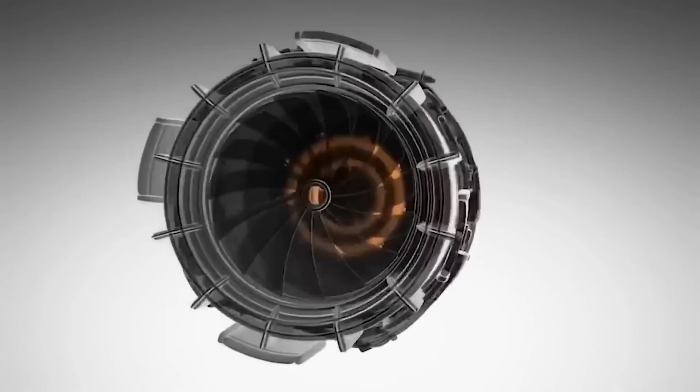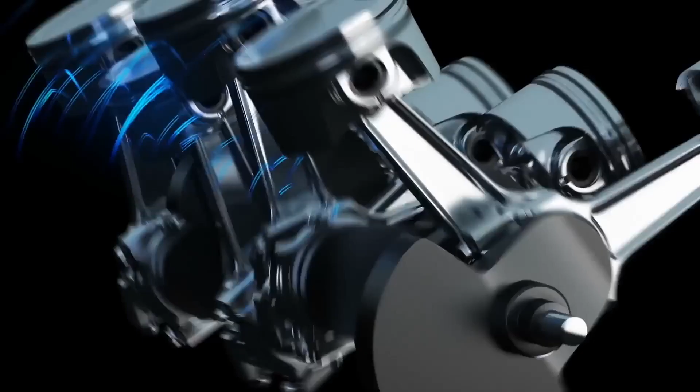In a groundbreaking announcement that could redefine the future of transportation and energy, Elon Musk has unveiled a revolutionary new water engine. This astonishing innovation promises to change everything we know about how engines work, potentially setting the stage for an era of unprecedented environmental sustainability.

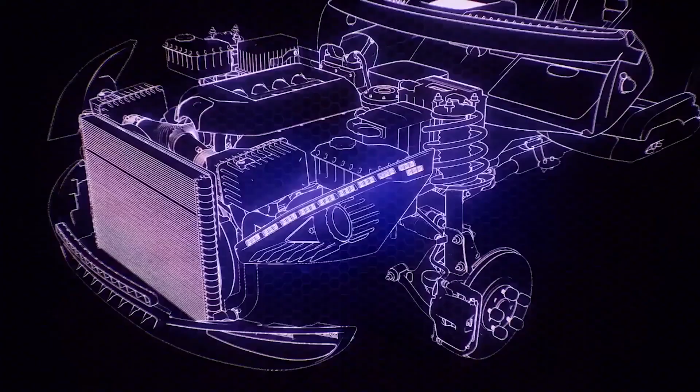But what makes this water engine so different? And how could it potentially alter the landscape of global technology and ecology? Let's uncover the mechanics behind Musk's latest venture and explore its far-reaching implications.

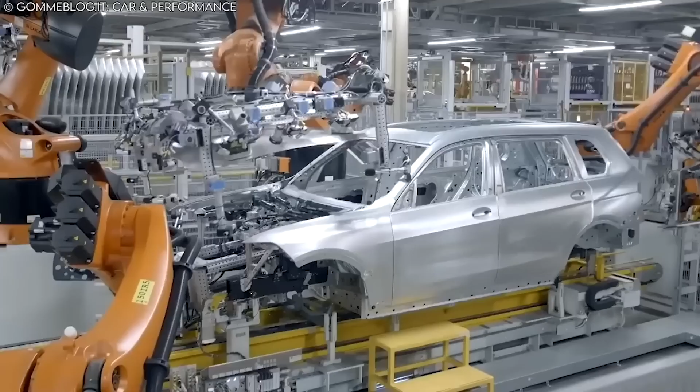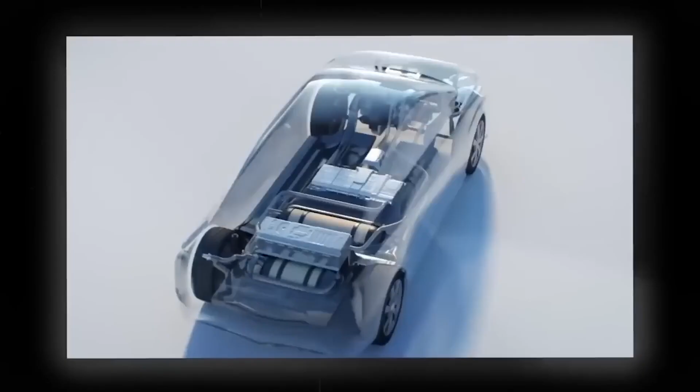Elon Musk surprised his X, formerly known as Twitter, followers by revealing a significant change in Tesla's direction. After years of skepticism, Musk announced that in 2024, Tesla will make a switch from batteries to hydrogen power. This unexpected shift was further emphasized as he disclosed that the first vehicle utilizing this new fuel source will be

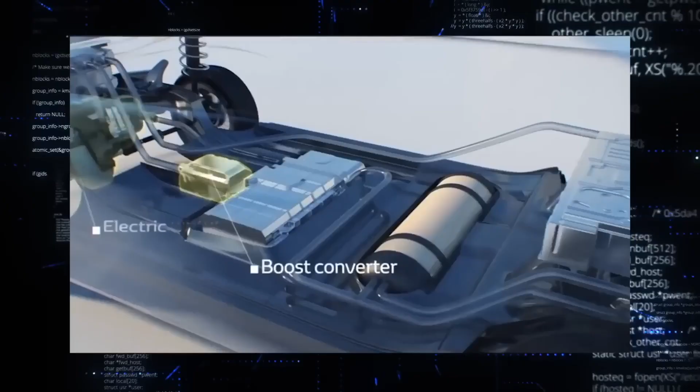named the Model H. Musk had once referred to hydrogen fuel cells as fool cells and expressed his belief that the technology was mind-bogglingly stupid. This complete reversal is now credited to challenges encountered in the mass production of the 4680 battery, prompting the company to reconsider its approach and opt for hydrogen power as an alternative solution.

Tesla, the global leader in electric vehicles since its establishment in 2003, has been spearheaded by Elon Musk. Committed to enhancing the average living standards through cutting-edge technology while prioritizing environmental sustainability, Musk has steered Tesla to the forefront of the renewable energy and transportation revolution.

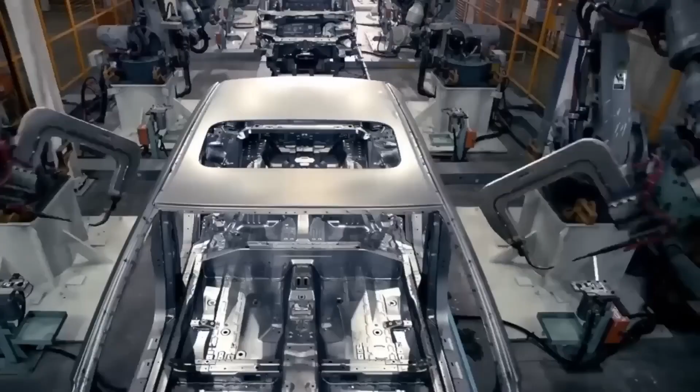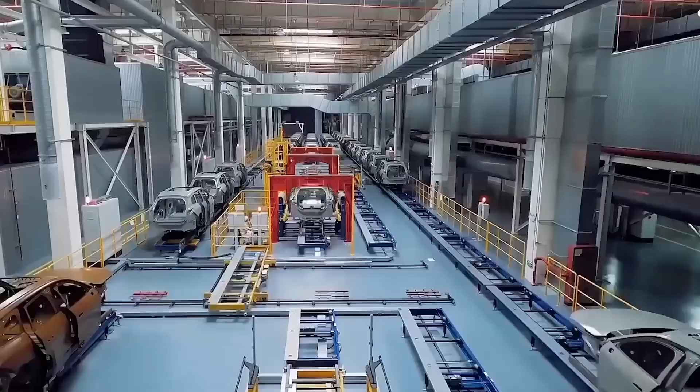Investing in various eco-friendly projects and utilizing his platforms to advocate for change, Musk aims to change the way people think about energy, fuel, and climate change. As the world increasingly accepts and advocates for cleaner energy solutions to combat climate change, electric vehicles, with Tesla leading the charge, are gaining popularity.

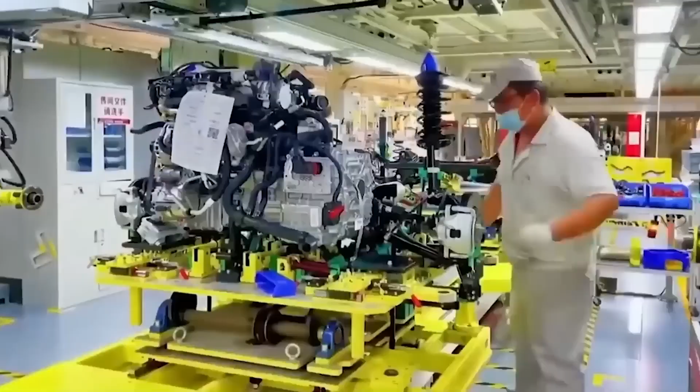Tesla has recently gone public with their plan to introduce a new energy source: hydrogen fuel cells. This development prompts the question: what are hydrogen fuel cells, and how will they transform your driving experience? Vehicles, notorious for contributing significantly to climate change through fuel combustion, have seen a transformative alternative in electric cars. Tesla, Musk's multi-billion-dollar automotive giant, produces 500,000 electric vehicles annually, contributing substantially to the growing societal acceptance of electric cars.

Electric cars, like those produced by Tesla, primarily rely on batteries for power. These batteries, similar to those in laptops but larger, store electricity obtained from the grid or charging stations. However, issues such as long charging times, range anxiety, and high costs have deterred consumers. In response, hydrogen fuel cells have emerged as a promising alternative, eliminating many of these drawbacks.

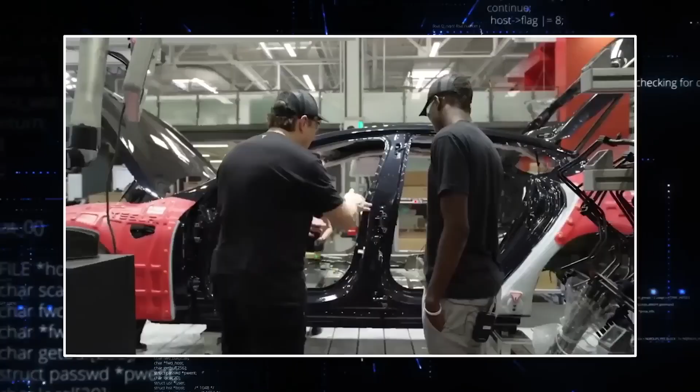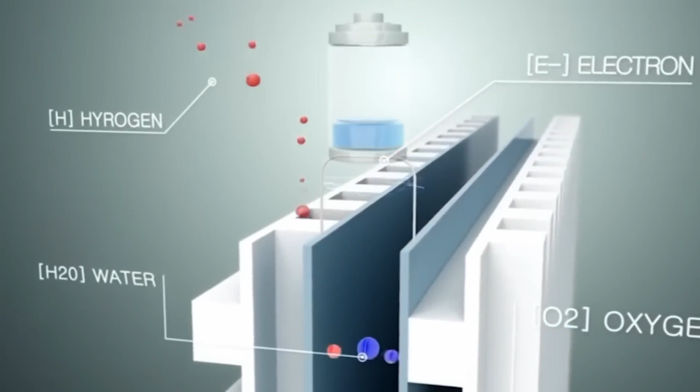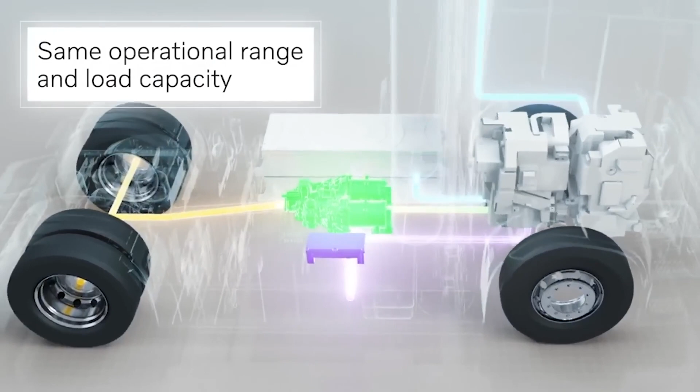Contrary to Musk's earlier skepticism about hydrogen technology, fuel cells have gained interest in the automotive industry. But what exactly is a hydrogen fuel cell, and how does it function? Positioned strategically among a vehicle's components, the fuel cell collaborates with a battery, electric engine, and hydrogen tank to generate energy. Multiple fuel cells work simultaneously through a process called reverse electrolysis, where hydrogen reacts with oxygen to produce electrical

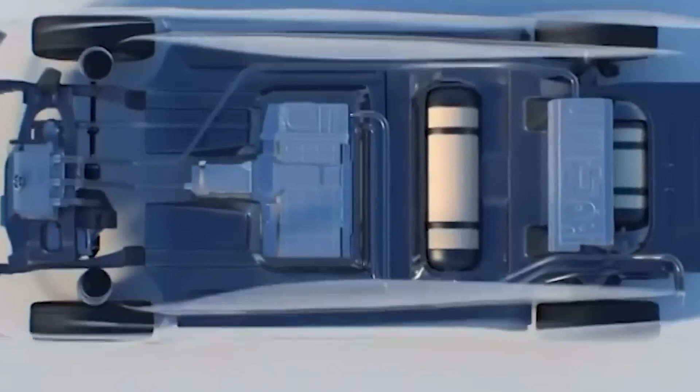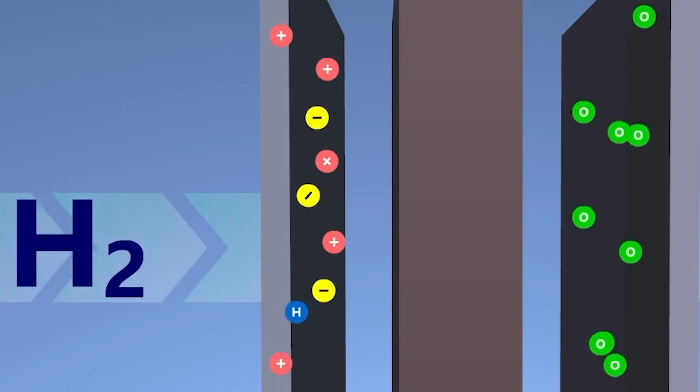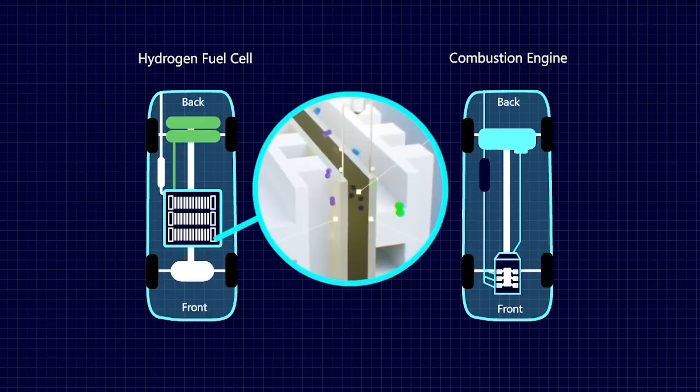energy. Unlike traditional electric vehicle batteries, fuel cell batteries are smaller as they are constantly charged by the fuel cell. This process ensures a continuous and sufficient supply of electricity. The byproduct of the fuel cell is water vapor, emitted harmlessly into the air. The quality of hydrogen used influences whether the byproducts contribute to climate change. Renewable energy sources produce hydrogen with a neutral carbon footprint. Despite public perceptions, scientists believe that hydrogen fuel cell technology holds promise and will catch up in the coming years.

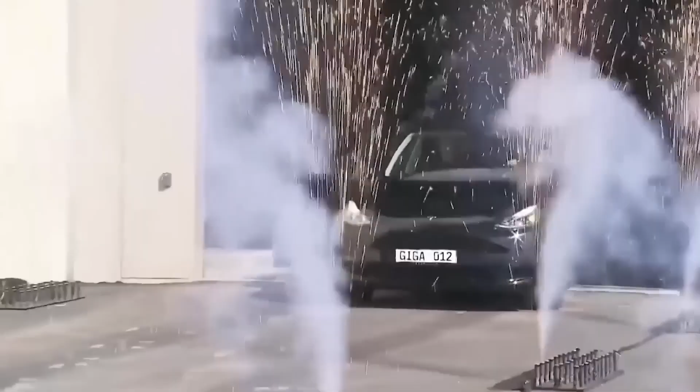Apart from the environmental benefits, fuel cell electric vehicles offer distinct advantages in the driving experience. One noticeable difference is the silence of electric vehicles. Without the mechanical sounds associated with traditional cars, electric vehicles provide a remarkably quiet ride. Hydrogen fuel cars, taking this a step further, stand out even among their electric counterparts due to their swift refueling time. Charging time is a significant factor between battery electric and hydrogen fuel cell cars.

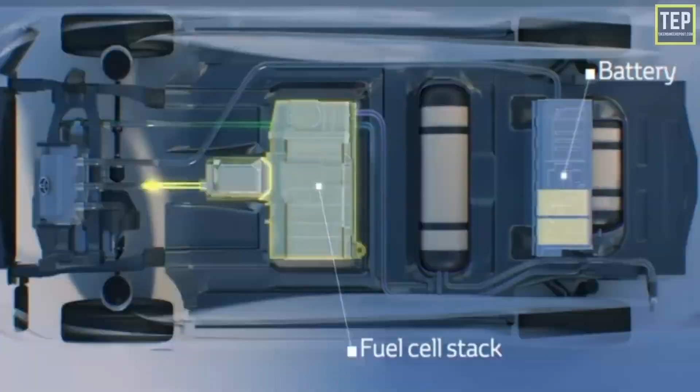While battery electric cars may take several hours to charge fully, hydrogen fuel cars are ready to go in no time, provided the hydrogen tanks are filled. This, coupled with the energy output of a hydrogen tank, gives fuel cell cars a more extensive range than their electric counterparts. From 2024 onward, the first vehicle to feature this innovation will be the Model H, boasting technology and a remarkable 0 to 60 miles per hour acceleration in just 1.2 seconds, with a range of 450 kilometers.

While hydrogen fuel cars are currently more expensive due to their rarity and the limited availability of hydrogen stations, industry experts predict a change in the next decade. With the urgency to address climate change, more automobile companies are embracing cleaner technologies.

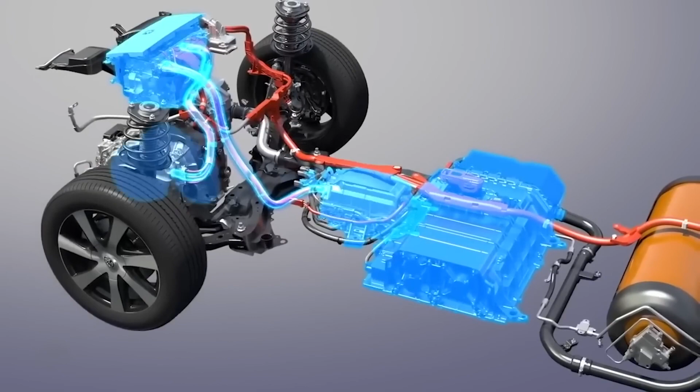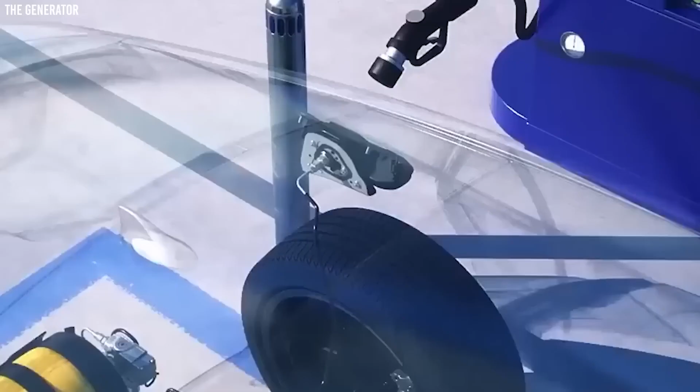Model 2 and Model 0 are slated for release in 2025 and 2027, respectively, and are expected to be supercars. As Tesla pioneers this shift toward hydrogen fuel cells, the automotive landscape is ready for a significant transformation.

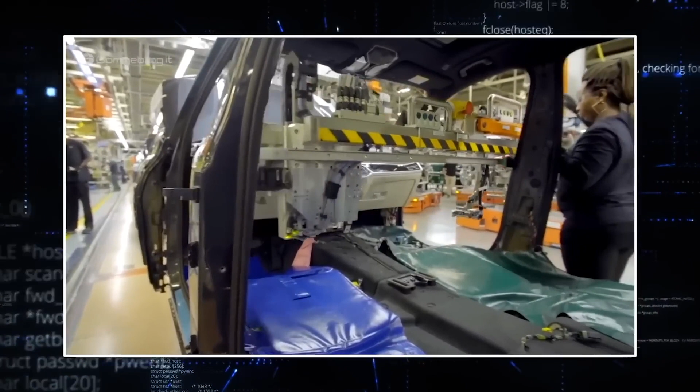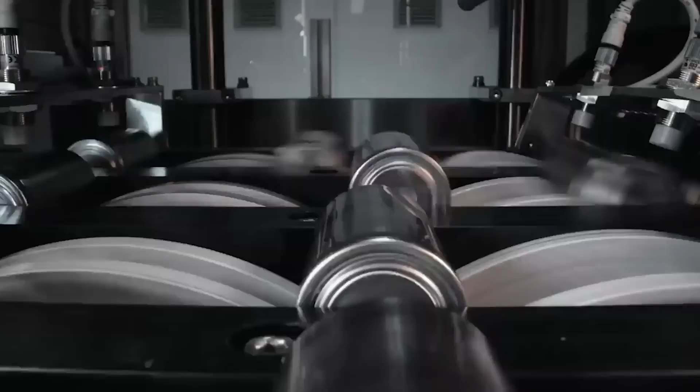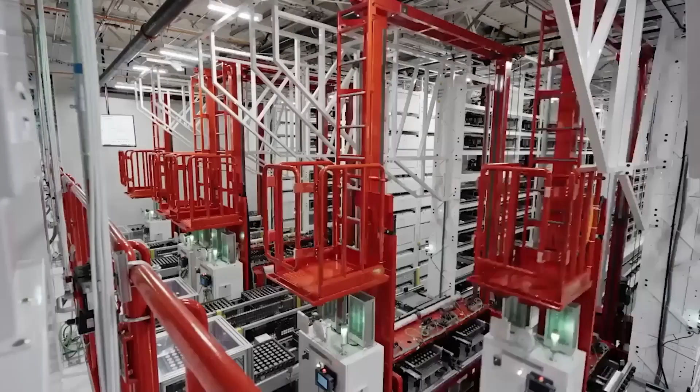Elon Musk is no stranger to controversy, and one of his lasting points of contention lies in his strong views on hydrogen as a fuel source for vehicles. However, as with many debates, not everyone is in harmony with Musk's perspective. In the changing landscape of electric vehicles, EVs, there exists a difference of opinions on the potential of hydrogen fuel cells versus traditional batteries. Musk's stance on hydrogen is robust and dates back several years.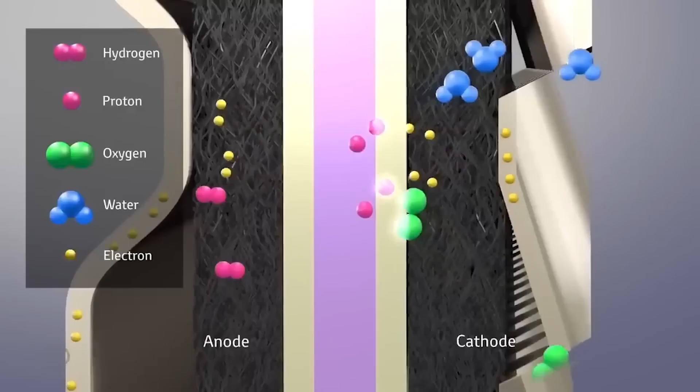During a discussion at the Automotive News World Congress, he honestly labeled hydrogen fuel cells as extremely silly. Musk highlighted the inherent challenges of producing, storing, and utilizing hydrogen in automobiles, emphasizing the technological superiority of existing battery technologies. Even with Musk's rigid position, the automotive arena is not a single company.

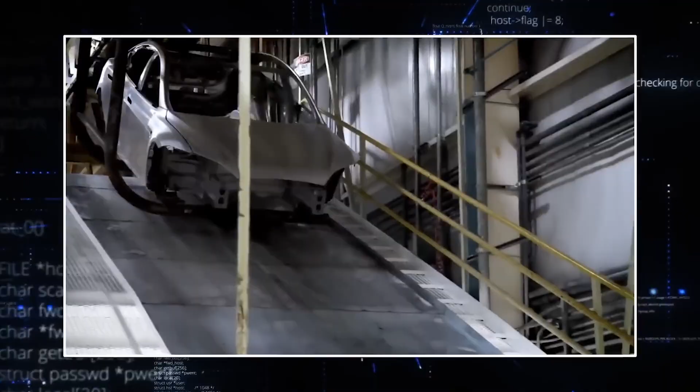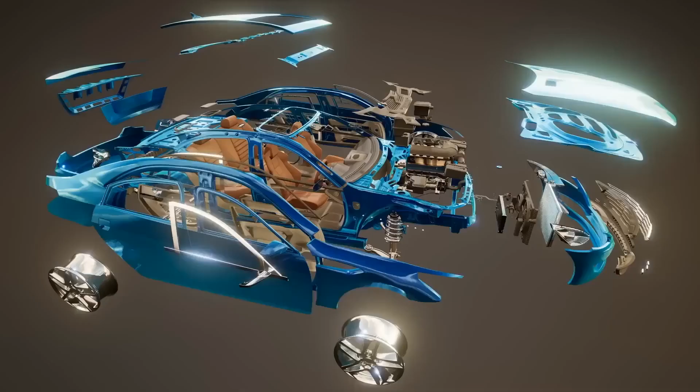Major players in the industry, including Toyota and Hyundai, have invested substantially in the development and production of hydrogen fuel cell vehicles. This commitment extends beyond industry giants, with smaller manufacturers like Riversimple actively engaged in creating hydrogen-powered cars. The contrast in opinions is not limited to the manufacturing side of the industry.

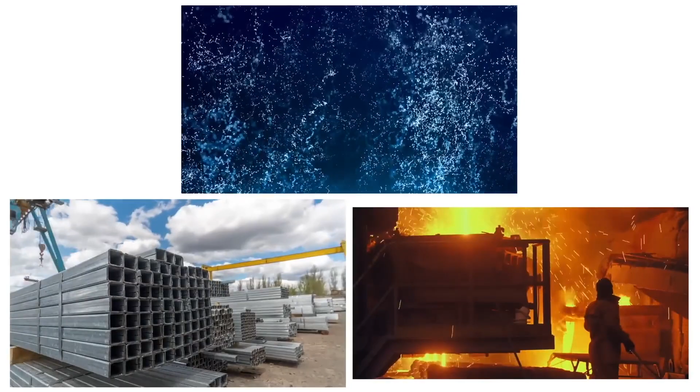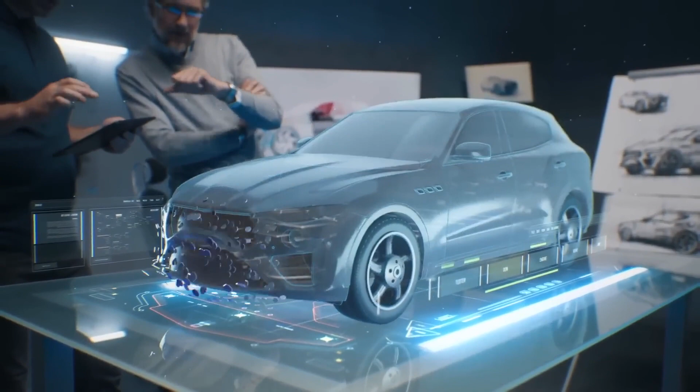Other prominent figures, such as Herbert Diess, the CEO of Volkswagen Group, have voiced similar concerns about the viability of hydrogen in the automotive sector. Diess states that green hydrogen produced using renewable energy sources is better suited for heavy industries like steel and chemicals, and should not find application in automobiles due to being expensive, inefficient, slow, and logistically challenging.

Musk's beliefs on hydrogen, expressed on various occasions, include a series of tweets in mid-2020 where he declared, "Fuel cells = fool cells," and insistently stated that hydrogen fuel cells make no sense. Despite these unequivocal statements, Musk has not publicly indicated any shift in his views on hydrogen when contacted via Tesla by CNBC.

The technological foundations of Musk's skepticism toward hydrogen lie in the fundamental differences between traditional battery electric vehicles and those powered by hydrogen fuel cells. According to the U.S. Environmental Protection Agency, EPA, hydrogen fuel cell vehicles, also known as fuel cell electric vehicles, FCEVs, share similarities with electric vehicles in that they use an electric motor instead of an internal combustion engine to propel the vehicle. However, the key distinction lies in how these vehicles generate electricity.

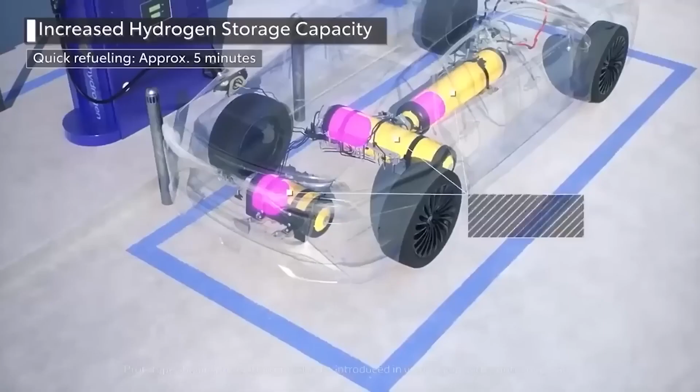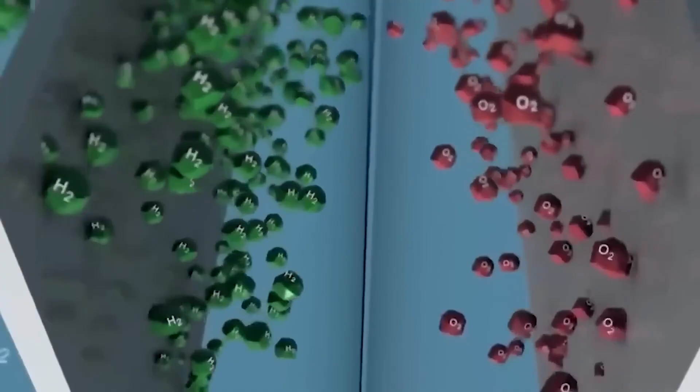In the industry of electric vehicles, batteries necessitate charging through external power sources. Contrastingly, fuel cell vehicles use hydrogen gas to generate electricity on board. This process involves the mixing of hydrogen gas from a tank with oxygen, resulting in the production of electricity. The diversity of opinions within the automotive sector is symbolic of the broader debate surrounding the future of transportation and the role of hydrogen in it.

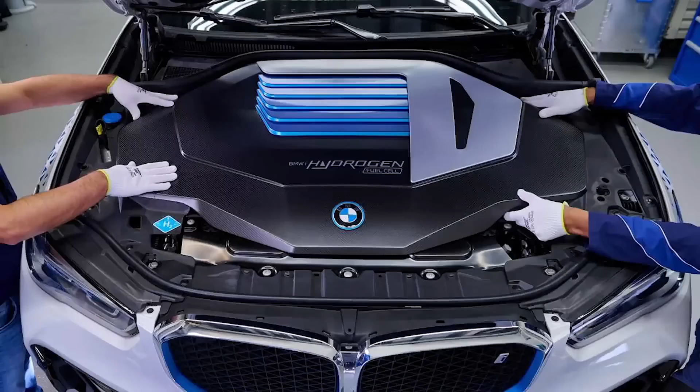In June, the BMW Group announced the initiation of tests for vehicles featuring a hydrogen fuel cell drivetrain, emphasizing its potential to complement internal combustion engines, plug-in hybrid systems, and battery electric vehicles. Despite the growing interest in hydrogen, especially within the context of fuel cell electric vehicles, it's essential to recognize that these technologies are not yet dominant in the market.

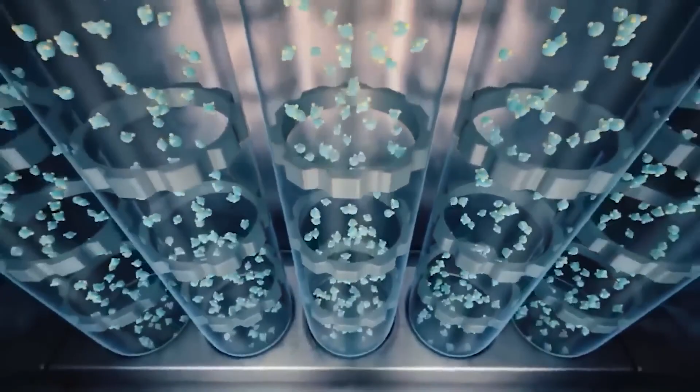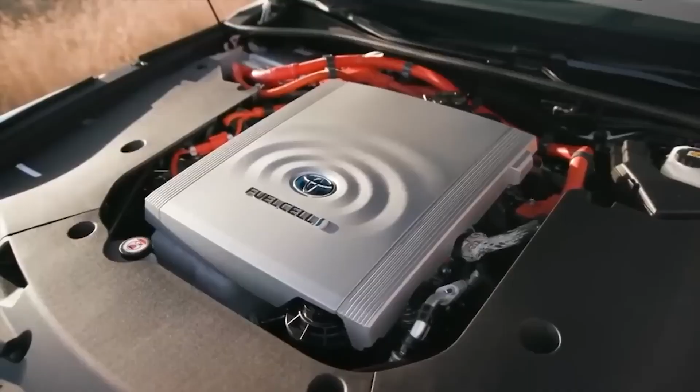Companies like Riversimple, though actively working on hydrogen-powered cars, offer them on a subscription basis, indicating that such vehicles do not currently constitute a substantial portion of overall car sales. Toyota, a large supporter of hydrogen technology, imagines its applications extending beyond automobiles to diverse settings, including heating, lighting, haulage, mass transit, and heavy industry.

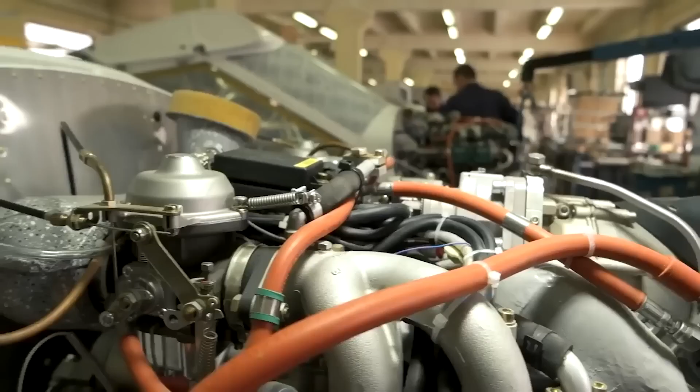The Fuel Cell and Hydrogen Energy Association voiced this idea, emphasizing the zero-emission benefits, long-range capabilities, quick refueling, and scalability of fuel cell electric vehicles and hydrogen energy. In the pursuit of low and zero-emission transportation, the conversation extends beyond passenger vehicles. Larger forms of transport, such as trucks, buses, trains, and planes, are increasingly considered within the purview of hydrogen fuel cells.

Daimler Truck's CEO, Martin Daum, advocates for a balanced approach, acknowledging the suitability of different technologies for distinct scenarios. While battery electric vehicles excel in city deliveries with lower energy requirements, long-distance transportation scenarios might benefit from the practicality of hydrogen fuel cells. The versatility of hydrogen fuel cells finds expression in various sectors beyond automobiles.

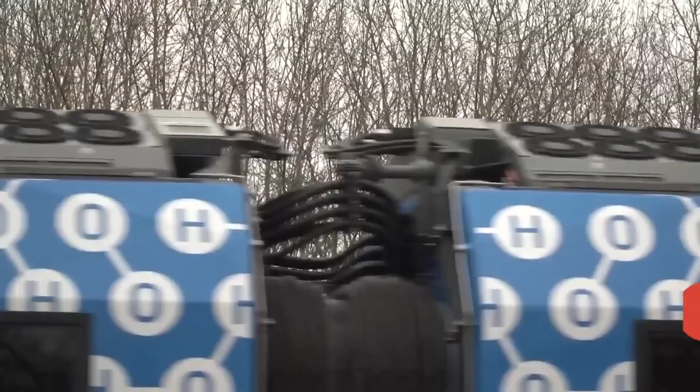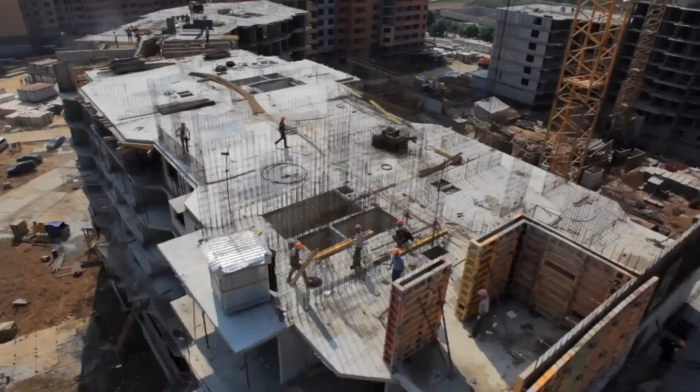European transport giant Alstom has developed the Coradia iLint, advertised as the world's first passenger train powered by a hydrogen fuel cell. In aviation, plans to operate commercial hydrogen electric flights have been announced, with aspirations to take to the skies in 2024. The construction industry, represented by major players like JCB, has not been left behind, with the development of a 20-ton excavator powered by a hydrogen fuel cell. While excitement surrounds the potential applications of hydrogen fuel cell technology, the path to mass adoption faces some big challenges.

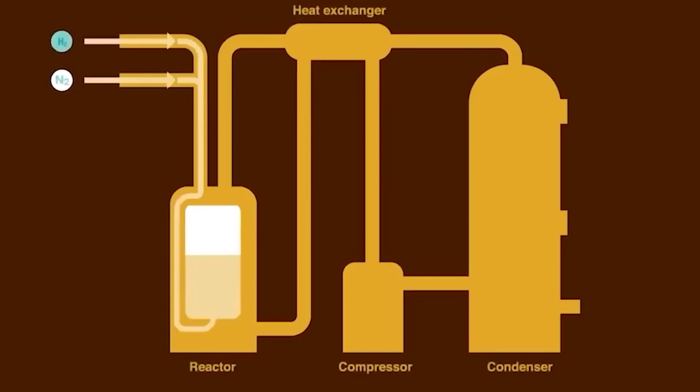Honda's decision to stop production of its Clarity plug-in hybrid and fuel cell models earlier this year demonstrates the hurdles related to durability, reliability, and vehicle cost. The US government has highlighted infrastructure limitations as a significant obstruction, quoting concerns about the current inability of the infrastructure to support the widespread adoption of fuel cell vehicles.

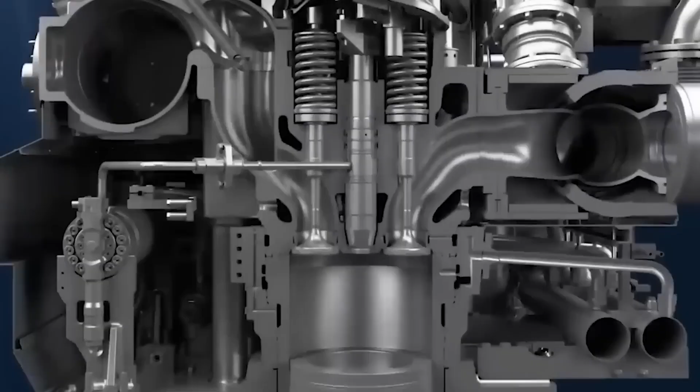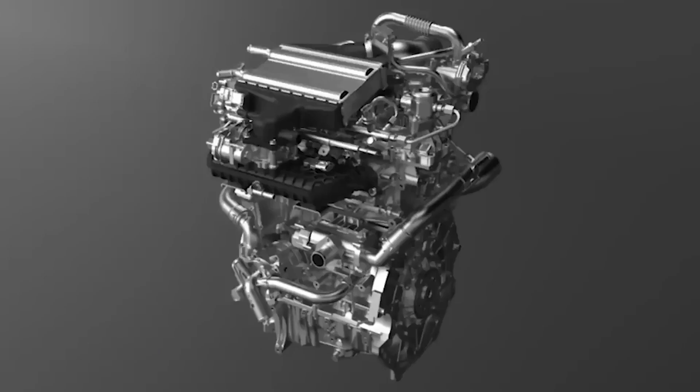The competitive landscape further complicates hydrogen's trajectory in the transportation sector. Green hydrogen, produced using renewable sources, not only contends with traditional fossil fuel-based hydrogen, but also competes with other conventional fuels such as petrol, diesel, and electricity. The challenges outlined by the International Energy Agency's Global EV Outlook 2021 emphasize the existing gap in registrations between fuel cell electric vehicles and traditional electric vehicles, attributing it to the limited availability of hydrogen refueling stations.

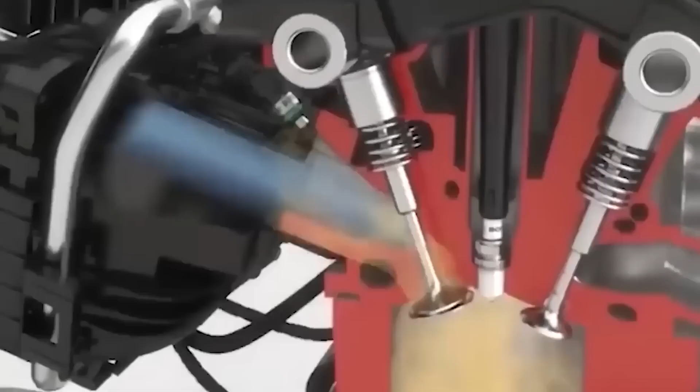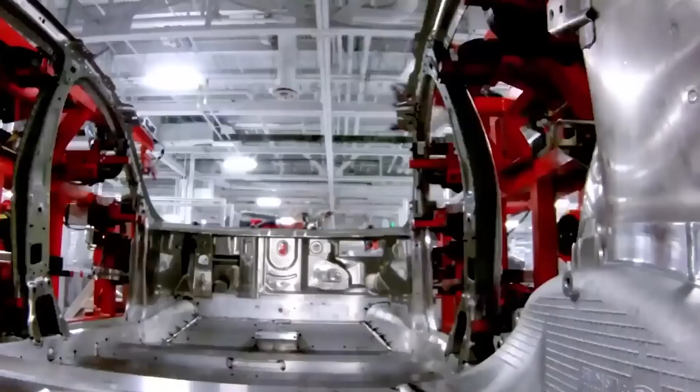Many people on X, formerly Twitter, have come together to discuss how they feel about this new revelation. Some have voiced their concerns that Musk had so strongly rejected these ideas of hydrogen-fueled vehicles for years and is now pushing ahead leading this change. Understandably, due to Musk's contradictions, critics remain skeptical until further information is given. Conversations have also turned to what Musk will capitalize on next. With talks of an ammonia engine, when will people say enough is enough?

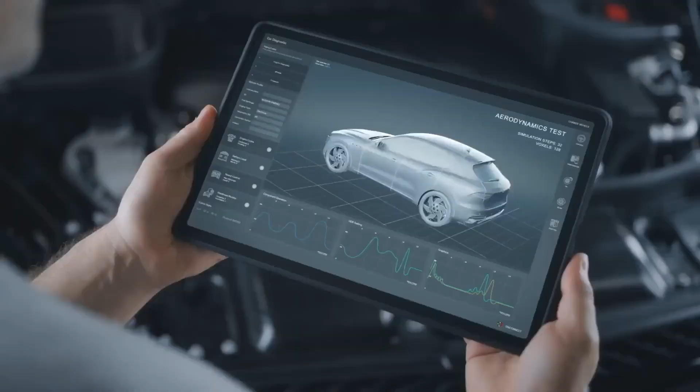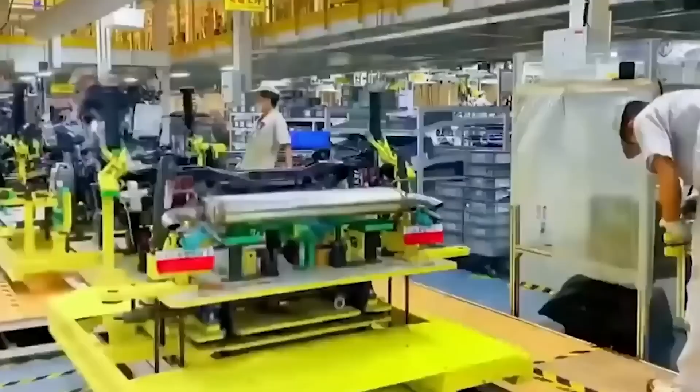The answer lies in the unique properties of ammonia, a hydrogen compound with higher energy density compared to hydrogen gas. An ammonia engine could potentially offer greater range than traditional combustion engines without the emissions linked to gasoline or diesel. Ammonia can be produced sustainably from renewable sources, adding a layer of environmental sustainability to the fuel.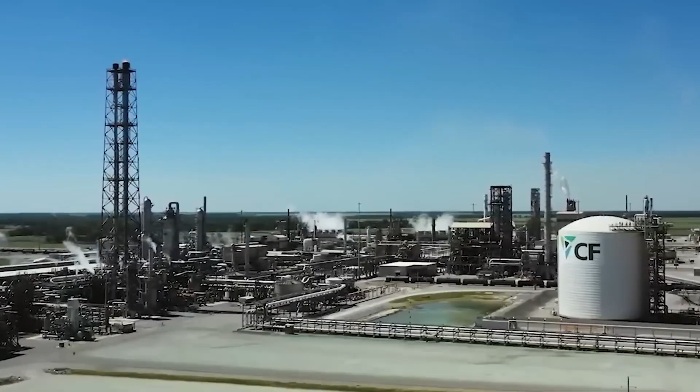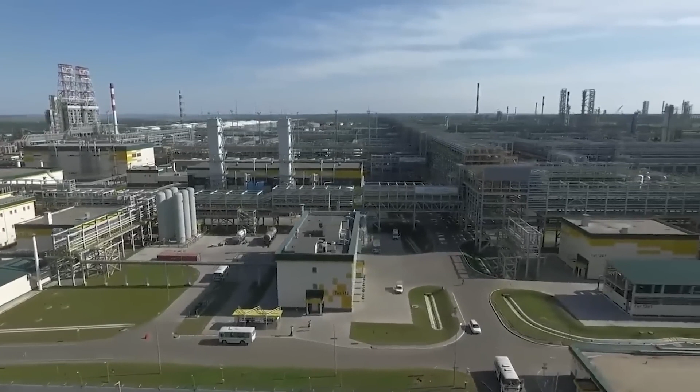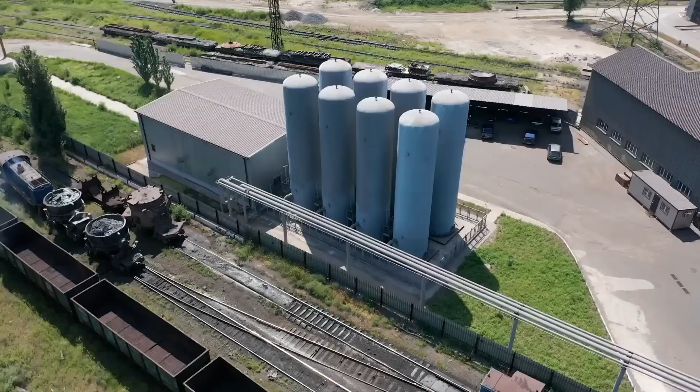However, skepticism exists regarding the future dominance of ammonia, with critics arguing that the transition faces challenges, including the virtually non-existent infrastructure for ammonia refueling. Safety concerns, potential accidents and the energy-intensive production process also cast shadows on ammonia's viability. The success of this venture is not guaranteed yet, and this engine is in its very early days of discussion and development. In the ongoing race to shape the low and zero-emission future of 21st century transportation, battery electric vehicles currently lead the charge. However, the road to success is not simply a straight line or without obstacles.

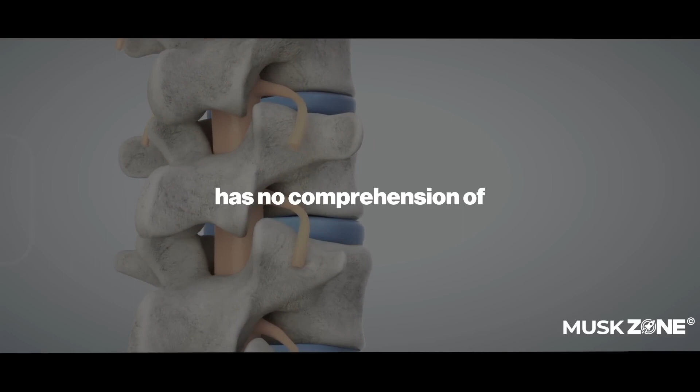Along the way, Neuralink can solve a lot of brain issues. I think the work in Neuralink will definitely shed a lot of insight into how the brain and the mind work. Elon Musk delves into the future, envisioning a world where the lion's share of human intelligence resides within the digital realm, opening new frontiers and understanding cognition. And hopefully bring us along for the ride, you know. But the vast majority of our intelligence will be digital. Think of the difference in intelligence between the cortex and your limbic system; it is gigantic. Your limbic system really has no comprehension of what the cortex is doing.

And in the short term, it can interface with any given section of your brain and solve a tremendous number of things that cause debilitating issues for people. So Neuralink, you'll be able to see Neuralink coming from a very long distance, because any device that you implant in a human you have to go through so many tests. It moves very slowly. You just do a few people at a time, and then you go to extreme lengths to prove safety.

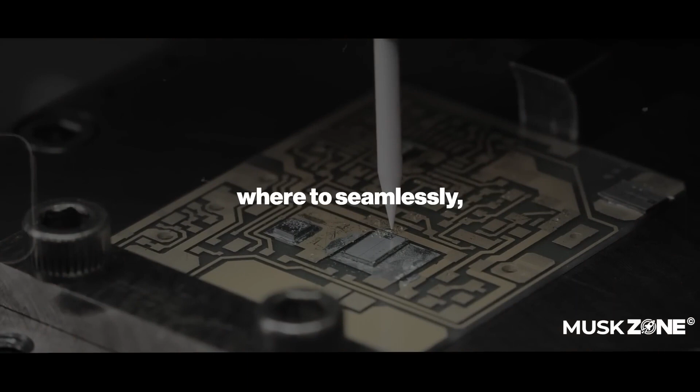So I want to emphasize the purpose of Neuralink. What's our goal? Our goal is to solve important spine and brain problems with a seamlessly implanted device. So you want to have a device that you can basically put in your head and feel and look totally normal, but it solves some important problem in your brain or spine. Exploring the mission of Neuralink, Musk elucidates the groundbreaking pursuit of addressing brain and spinal injuries, ushering in an era where neural maladies are not just treated but revolutionized.

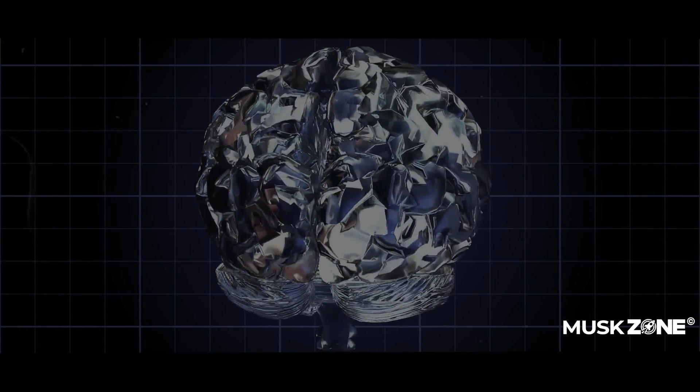The overarching goal of Neuralink is to create ultimately a whole brain interface. So a generalized input-output device that, in the long term, literally could interface with every aspect of your brain. Well, I mean, the thing I wanted to emphasize is that it's not going to sort of pounce on us overnight. You'll see it coming. It's going to be very slow. In fact, I really think that artificial general intelligence or digital superintelligence is likely to arrive before we have really advanced neural links. At least that's where the trend is right now.

Musk paints a future where the profound advancements of Neuralink might enable the transfer of human cognitive capacities into an unprecedented realm, akin to a digital Optimus. Well, yeah, I mean, in the short term, Neuralink is just about solving brain injuries and spinal injuries and that kind of thing.

So to be clear, for many years, Neuralink's products will just be helpful to someone who has lost the use of their arms and legs, or who has just a traumatic brain injury of some kind. That's what Neuralink will be useful for many years.

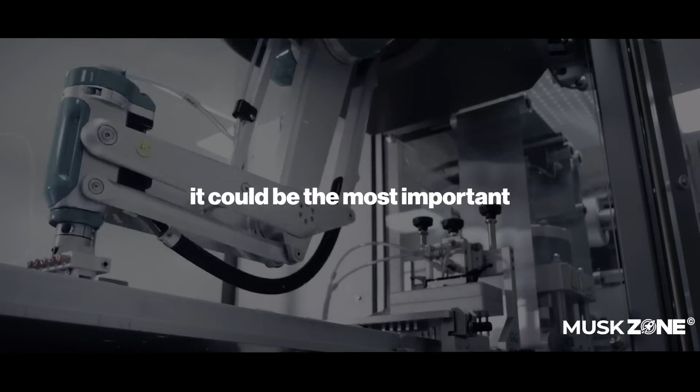But in our last conversation, you said that Neuralink is among all your projects, for you, the most important one. Is that still true? I know I said it could be. I wouldn't say for sure it is the most important, but it could be the most important, in that there is a long-term mitigation to artificial intelligence, which is that we could effectively merge with artificial intelligence by improving the speed of interaction between our cortex and our tertiary layer, which is already silicon.

We're already a sort of a 3-level intelligence creature. The base level is the limbic system, the sort of animal brain or reptile brain, essentially, the sort of fundamental animal or reptile brain. And then there's the cortex, which, by the way, is largely in service to the reptile brain.

Could you imagine that one day we would be able to download our human brain capacity into an Optimus? Yes. I'm not saying this is, I think it is possible to do that. It is possible. The aspiration to unlock the mysteries of the human mind drives Neuralink's endeavors, promising to unravel the intricacies of the brain's functioning and its profound interplay with the mind. But ultimately, the idea would be to achieve a symbiosis between our biological mind and our kind of digital mind.

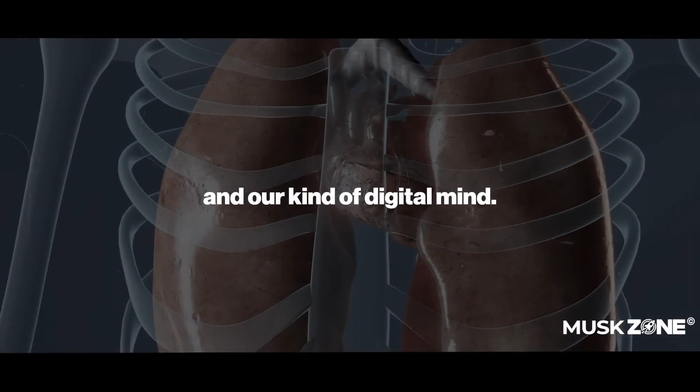So we're already kind of a cyborg if you think of your phone and your computers as an extension of yourself. In fact, if you leave your phone behind, it's like you have missing limb syndrome. You're like, where did it go? So the phone is a kind of an extension of ourselves, like computer is. The various applications that we use are already an extension of self. So we are already a cyborg. It's just that the interface is with our eyes and our fingers. Yeah.

And that interface, especially output, the rate at which we can type words into a phone or a computer, is very slow. Our input is much better because the data rate from vision is, I don't know, many thousands of times, maybe 1 million times better than the rate at which we can output. So input is roughly 1 million times better than output. Describing neurons as the wiring of the brain, Musk underscores the necessity of electronic solutions to address the intricate electronic challenges posed by neural malfunctions.

Yeah, I think the work in Neuralink will definitely shed a lot of insight into how the brain and the mind works. Right now, the data we have regarding how the brain works is very limited. We've got fMRI, which is kind of like putting a stethoscope on the outside of a factory wall, all over the factory wall, and you can sort of hear the sounds, but you don't know what the machines are doing really. You can infer a few things, but it's very broad brushstroke.

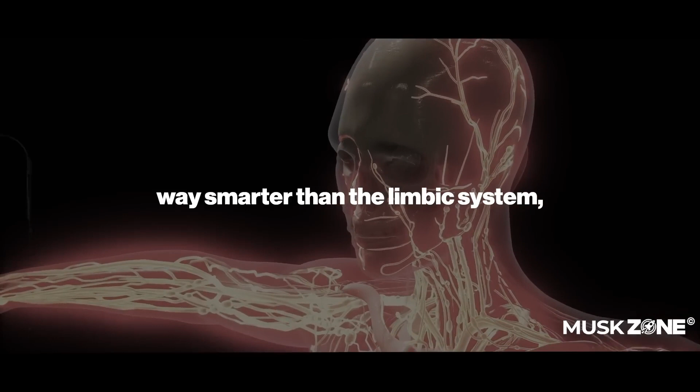So I haven't yet met anyone who wants to delete their limbic system or delete their cortex. Everyone's quite happy having both. Yeah, they're like, oh, I like it the way it is. But your cortex is way smarter than your limbic system. But the irony is that even though the cortex is way smarter than the limbic system, most of what it's doing is trying to make the limbic system happy.

The ultimate objective is to restore functionality to individuals severed from a full connection between their brain and body, ushering in an era of unprecedented neural restoration.

A lot of times people think that they couldn't really work at Neuralink because they don't know anything about biology or how brains work. And the thing that we really want to emphasize here is that you don't need to, because when you break down the skills that are needed to make Neuralink work, it's actually many of the same skills that are required to make a smartwatch or modern phone work. So it's software, batteries, radios, inductive charging, as well as things that are specific to us, like animal care and clinical and regulatory matters.

Obviously, machine learning, that phrase is used a lot. But we also need to interpret the signals from the brain, which is a biological neural net. And the best thing to interpret a biological neural net is a digital neural net.

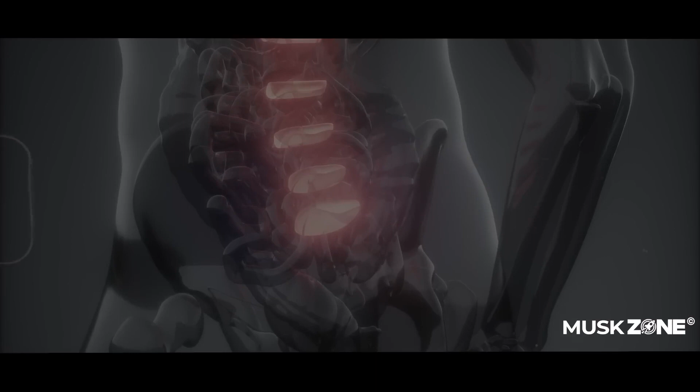Along the way, Neuralink can solve a lot of brain issues, like if you got a severed spine or something. So one of the first applications we're looking to solve is implanting Neuralink in someone who is a quadriplegic or tetraplegic. So they can't move their arms and legs, or maybe not even really move most of their face.

They can maybe blink or something like that, like Stephen Hawking, or they didn't have a severed spine, but there are various mechanical breakages or diseases that break the link between your brain and body. And Neuralink can solve that. We're confident Neuralink can enable someone who is a tetraplegic to operate a phone or a computer faster than someone who has working hands.